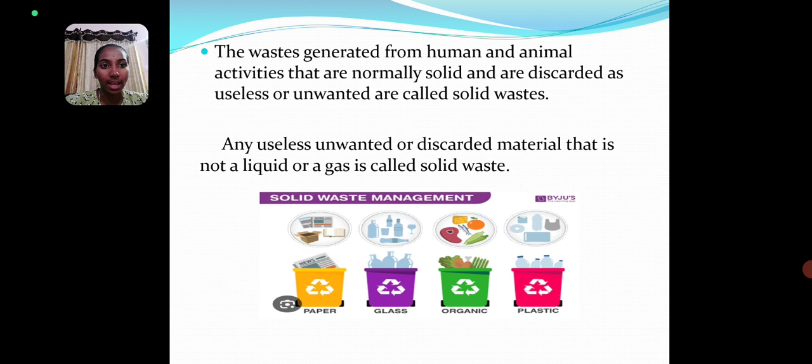Solid waste management, generally written as SWM, is associated with the control of waste generation, its storage, collection, transfer and transport, processing and disposal in a manner that is in accordance with the best principles of public health.

The urban solid waste generated from domestic and commercial activities are called municipal solid waste. It is estimated that at present India produces 42.0 million tons of municipal solid waste annually.

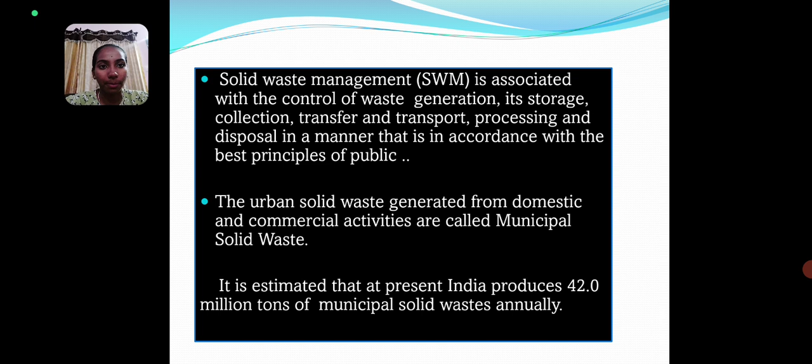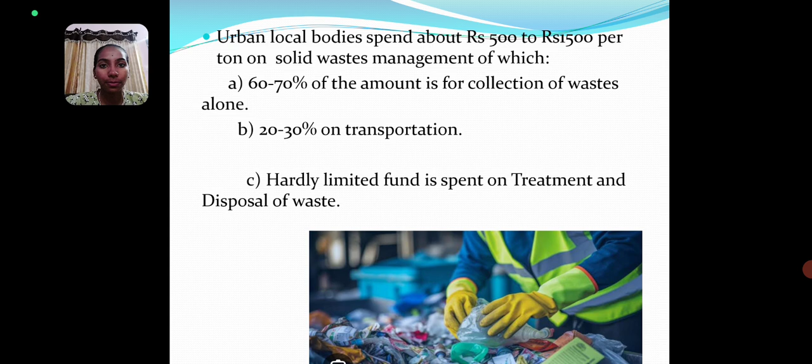Urban local bodies spend about Rs 500 to 1500 per ton on solid waste management, of which 60 to 70% of the amount is for collection of waste alone, 20 to 30% on transportation, and hardly any limited fund is spent on treatment and disposal of waste.

Now let us look into the elements of solid waste management. There are 6 elements: generation, on-site handling and storage, collection, processing and resource recovery, transfer and transport, and disposal. Here we can observe the flow chart.

First there is generation of the waste, then it comes to handling and storage, then it is collected, then it is transferred and transported, or it can be processed or recovered, then at the last stage is disposal. Now let us look into each of the elements briefly.

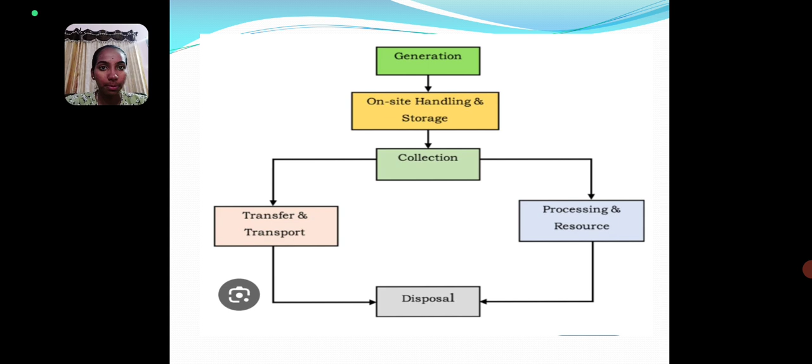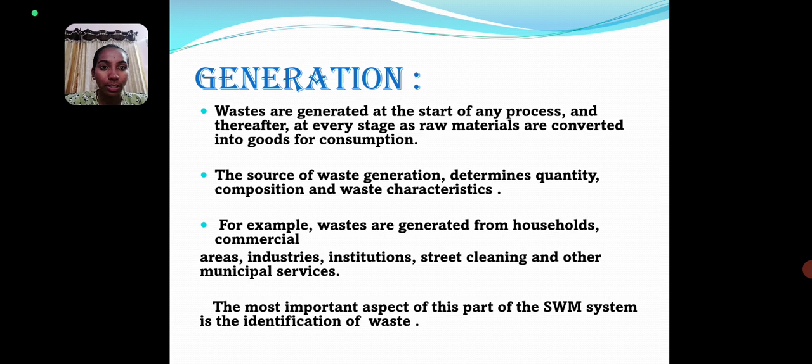The first one is generation. Waste are generated at the start of any process and thereafter at every stage as raw materials are converted into goods for consumption. The source of waste generation determines quantity, composition and waste characteristics. For example, waste are generated from households, commercial areas, institutions, industries, street cleaning and other municipal services. The most important aspect of this part of the solid waste management system is the identification of waste.

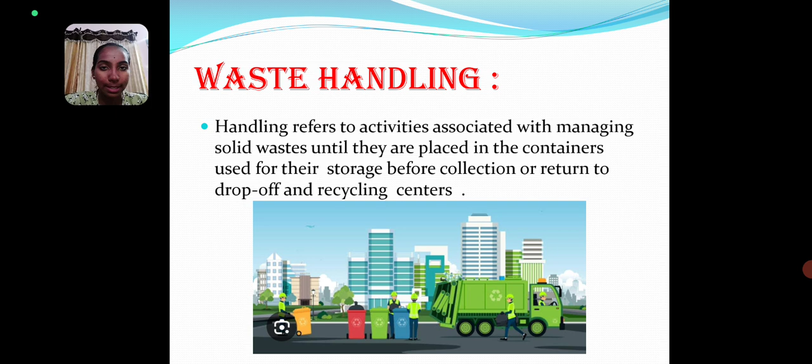The second one is waste handling. Handling refers to activities associated with managing solid waste until they are placed in the containers used for their storage before collection or returned to drop-off and recycling centers. Depending on the type of collection service, handling may also be required to move the loaded containers to the collection point and to return the empty container to the point where they are stored between collections.

The next one is waste storage. Storage is a key functional element because collection of waste never takes place at the source or at the time of their generation. The heterogeneous waste generated in residential areas must be removed within 8 days due to shortage of storage space and presence of biodegradable material.

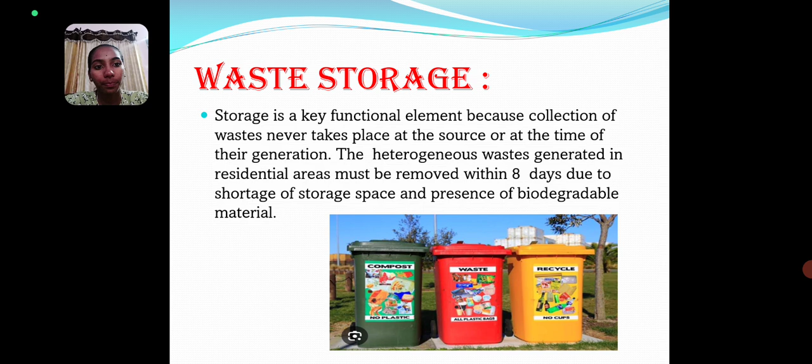The next one is collection. The term collection includes not only the gathering or picking up of solid waste from various sources but also hauling of this waste to the disposal site or transfer station and unloading there. While hauling and unloading are similar for most collection systems, the collection or pickup of waste varies with facilities and locations.

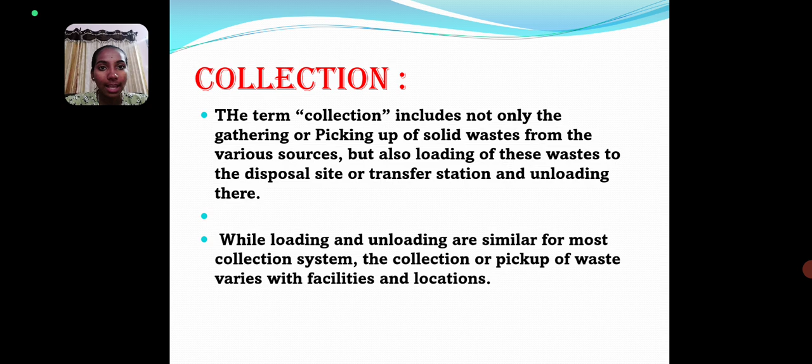The next one is transfer and transport. The transfer of waste from smaller collection vehicles, when necessary to overcome the problem of narrow access lanes, to larger ones at the transfer stations. The subsequent transport of the waste, usually over long distances, to the disposal sites.

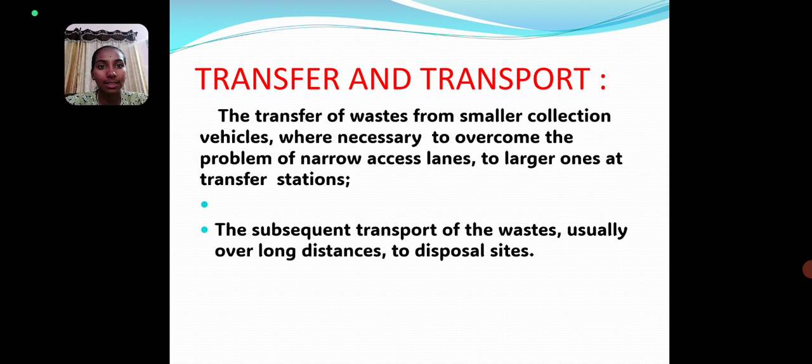The next one is resource recovery and processing. Resource recovery is a partial solid waste disposal and reclamation process. It can be expected to achieve waste reductions in future landfill volume requirements. Resource recovery must recognize what is worth recovering and the environmental benefit.

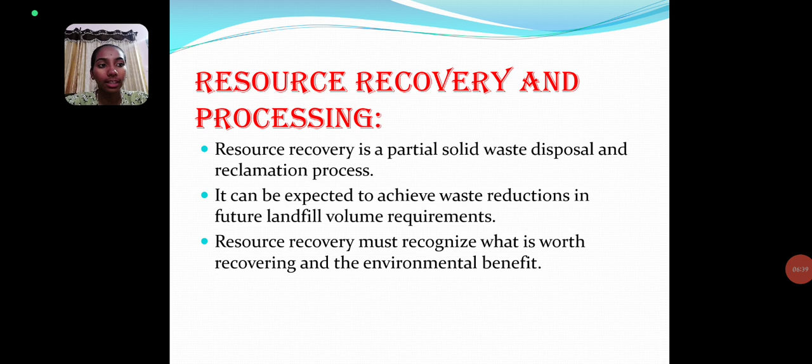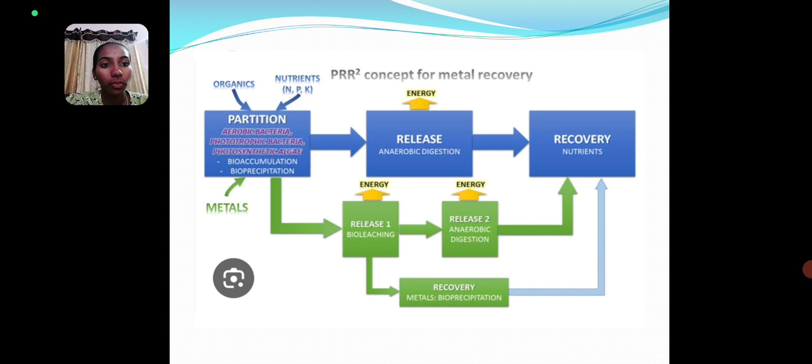In this slide we can observe how resource recovery takes place. First, there is a partition of organics and the nutrients part. Then there is a release of energy which undergoes anaerobic digestion. Then the recovery of nutrients. Before recovery of nutrients, there is release 1 of bioleaching, release 2 of anaerobic digestion, and then recovery.

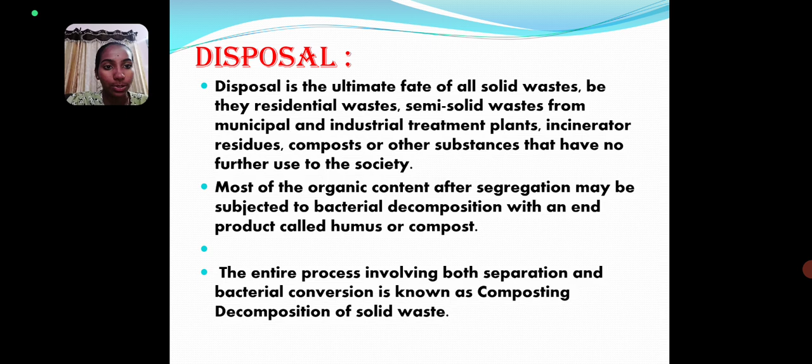The next and last one is disposal. Disposal is the ultimate fate of all solid waste, be it residential waste, semi-solid waste from municipal and industrial treatment plants, incinerator residues, compost or other substances that have no further use to society. Most of the organic content after segregation may be subjected to bacterial decomposition with an end product called humus or compost. The entire process involving both separation and bacterial conversion is known as composting, the decomposition of solid waste.